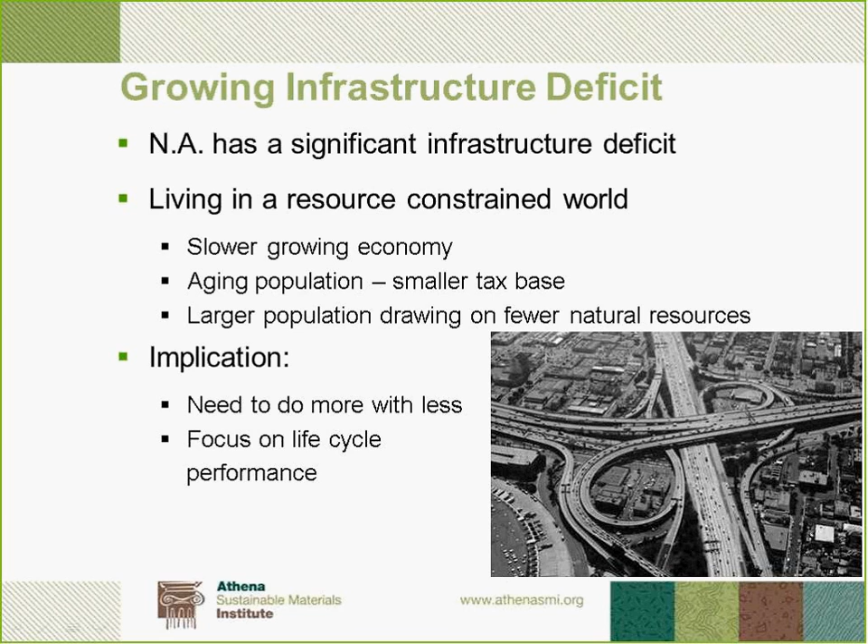It is used by various industries when they are serious about reducing environmental footprint. We can't easily reduce our footprint if we don't know what kinds of impacts we have, how big they are, and where hot spots are. Manufacturers use LCA to reduce footprints of products. Designers use LCA to reduce footprints of their products as well, which would be buildings, highways, etc. If we don't use LCA, we're just guessing what sustainable is and what it isn't.

Without LCA, we also tend to focus on a single issue or a single life phase. We may therefore be missing a major part of the equation. We may be addressing short-term improvements while incurring long-term damage. We may be fixing the wrong part of the problem. We may be shifting our environmental burdens from one phase to another. Here's a specific LCA diagram courtesy of our colleagues at MIT. The end of life cycle stage does not come into play, as we consider roadways to be permanent pieces of infrastructure that undergo maintenance and rehabilitation into the foreseeable future.

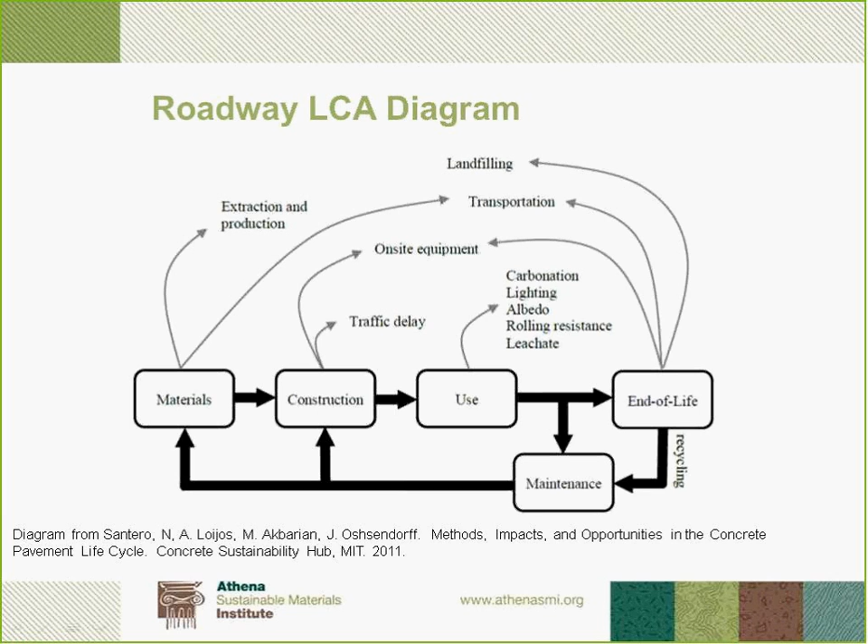The Impact Estimator for Highways was originally conceived of in 2009 and has been under development ever since. The beta version was released in spring 2011 and was funded by Environment Canada and the Cement Association of Canada, with technical highway engineering expertise from Morrison Hershfield. The commercial version was released in May 2013 and was funded by the Cement Association of Canada.

With the Impact Estimator for Highways, the tool can be used to model life cycle effects for roadway cross-sectional design, with LCA results for materials manufacturing, roadway construction, use phase, and maintenance life cycle stages. It allows custom roadway design, but also comes with a library of existing designs that can be used as a launching point for a new design, or can be duplicated and the duplicates modified.

The data of library roadway designs cannot directly be altered by the end user. Rather, users can use the database library designs as starting points, as I just mentioned, by either loading and duplicating the sample project version of the library, or creating new roadway designs and choosing a library design from the scenario drop-down list. Grant will show this later during the demonstration.

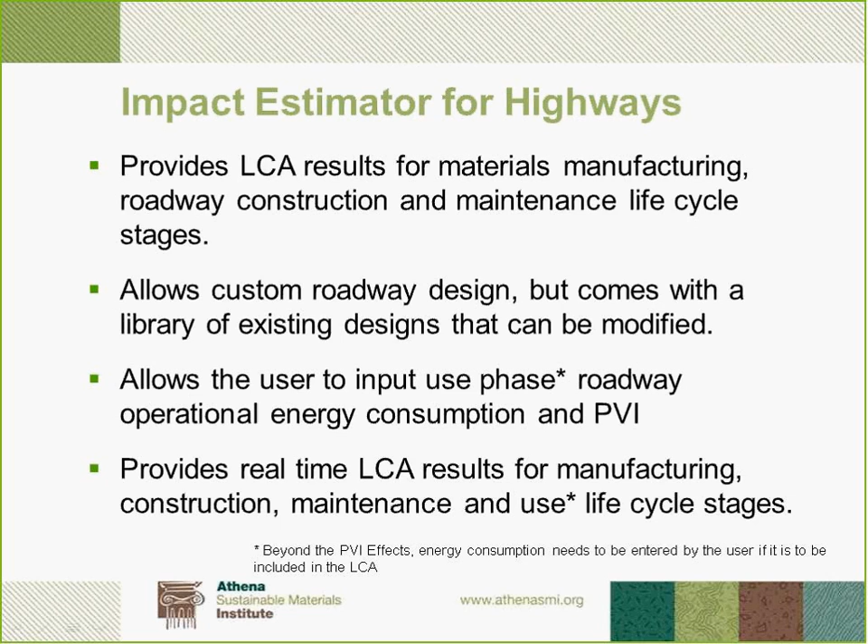It allows user input of use phase roadway operational energy consumption and pavement vehicle interaction effects, broken into two buckets: consumption due to PVI and roadway operational energy consumption. It also provides real-time LCA results for manufacturing, construction, maintenance, and use life cycle stages.

There are about 100+ roadway materials in the database, and it's growing. Of these, there are 40 component materials for which we have regionalized LCI data, and the products like asphalt or cement concretes or admixtures or a variety of custom mix designs are made up of the component materials. You create and save customized product mixes. You can make as many custom products as you want and save them in a user-defined custom product library.

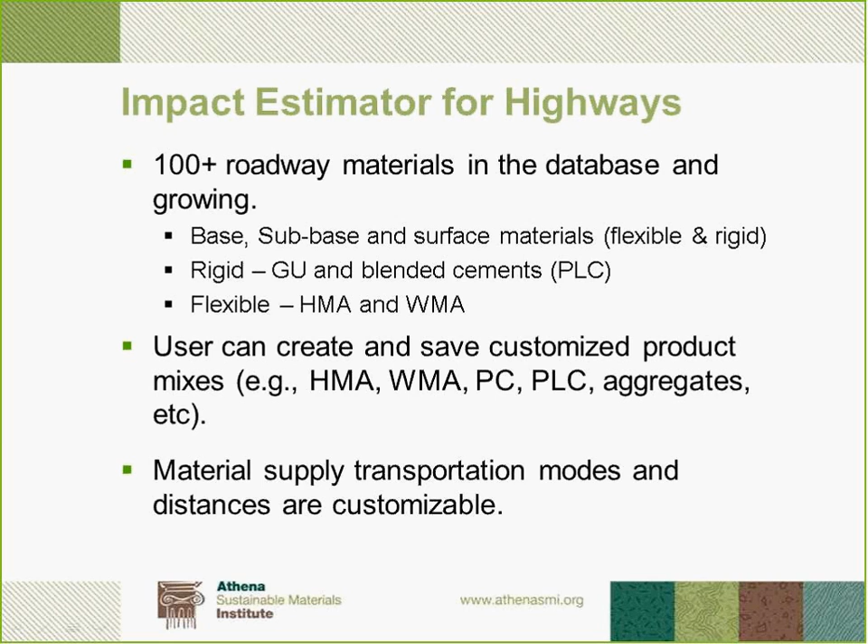Material supply, transportation modes, and distances are customizable. Material data can be regionalized to local transportation and energy grids. The large equipment database is customizable to reflect the regional and seasonal working conditions and usage rates. They do not include above or below ground material infrastructure, such as wing walls, culverts, bridges, etc., and do not account for site preparation or excavation, which we consider to be common to comparable road types and designs.

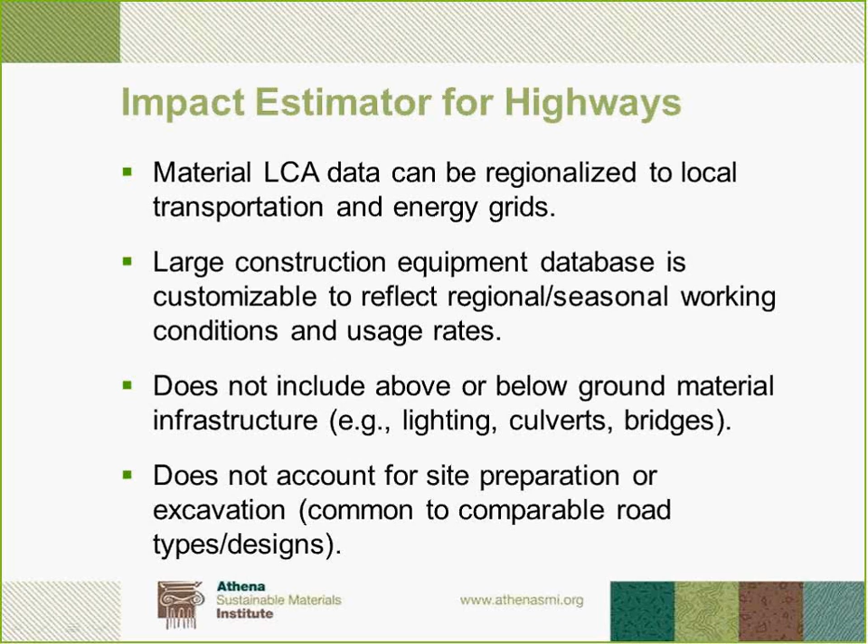Energy and transportation data are derived from proprietary Athena databases, as well as the U.S. Lifecycle Inventory database and the EcoInvent database. Material data represents national or industry averages for the extraction, processing, and manufacturing of materials and products. Regional grids and transportation distances are then applied to manufacturing process energies and material sourcing distances to arrive at regional data profiles.

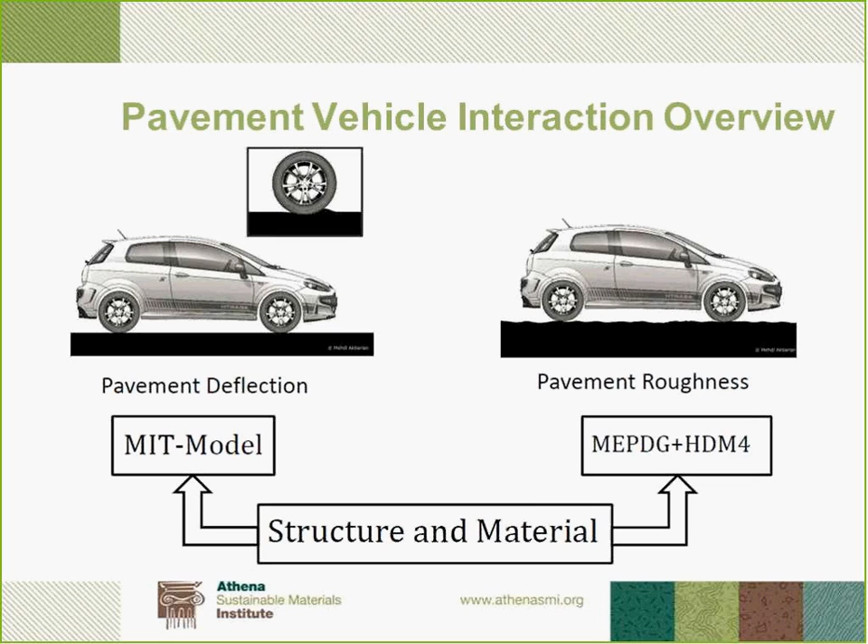You may ask yourself, what exactly is pavement vehicle interaction anyway? The PVI is based on the latest research and model from the Concrete Sustainability Hub at the Massachusetts Institute of Technology. Here is an image that helps to visualize the two components of PVI. Deflection causes the tires to constantly be rolling uphill. Roughness causes the tires to experience friction along the roadway surface. PVI is a function of roadway deflection and surface roughness, both of which depend on the makeup of the top layer of pavement on a given roadway surface.

The model demonstrates possible increase in vehicle fuel consumption and related effects associated with the pavement performance over time. It does this by contrasting the pavement's roughness and its deflection over time relative to a theoretical rigid and smooth roadway, focusing on the effect of the pavement's performance, not the life cycle vehicle effect. Fuel consumption for passenger vehicles and trucks. It models the influence of progressive increases in roughness and deflection of the roadway's top layer over time, measured between major rehabilitations, and a calculated decline in performance as increased vehicle fuel use due to the pavement characteristics.

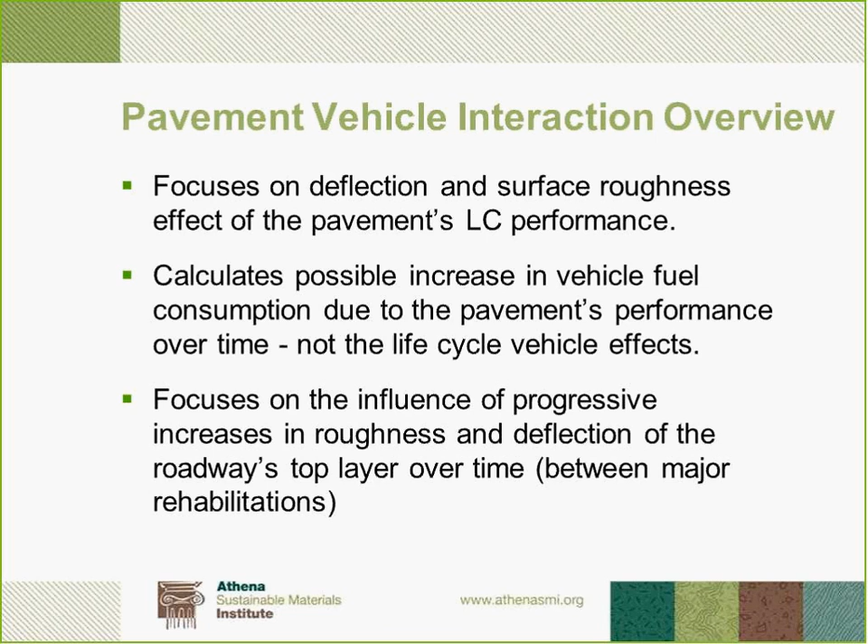The PVI inputs include the following: length, traffic speed, times or slices that represent the start and end years between major rehabilitation events, the standard International Roughness Index values for each time segment, elastic modulus, thickness and density average values for each time segment, vehicle type, annual daily traffic expected at the beginning of the project, and the projected annual growth through the end of the project lifespan.

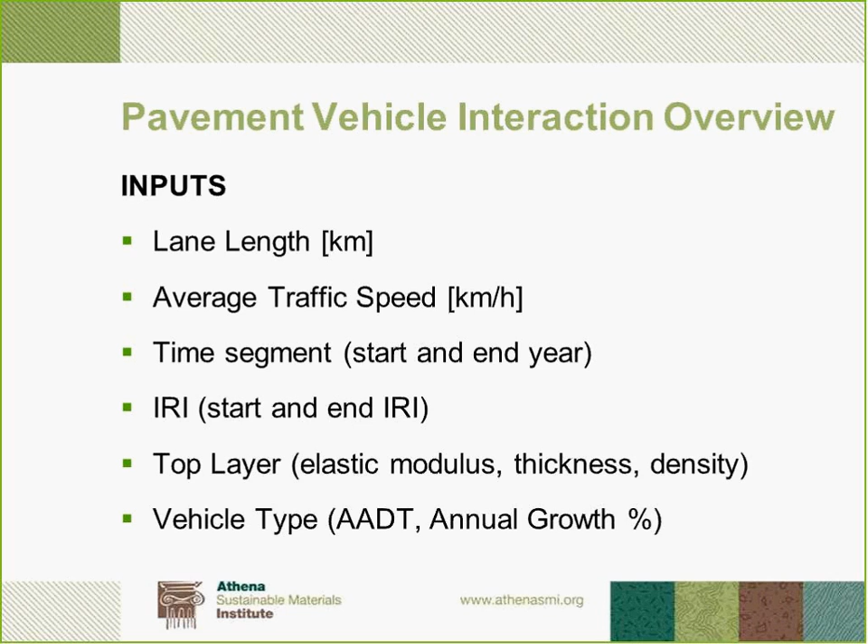Results include possible fuel consumption increase and related effects associated with the pavement performance on a per vehicle basis. Passenger vehicles and trucks, again, are based on Federal Highway Administration vehicle classes, for vehicles projected to be using the roadway during the projected lifespan; the default value for projected lifespan is 50 years. The results are dependent on average vehicle fuel consumption and physical characteristics. The lack of quality fuel consumption data by vehicle type at specific traffic speeds is an area of concern that is presently being looked into by our colleagues at MIT, a deficiency in the data upon which the model is dependent.

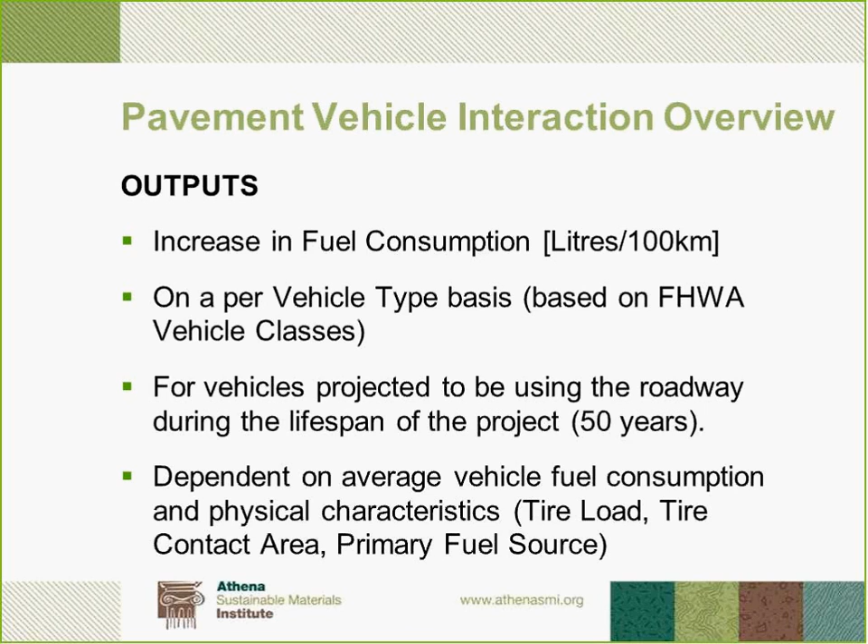PVI has been studied in a number of one-off pavement reports. To our knowledge, it has never been incorporated into a commercial software tool. Unlike life cycle inventory data for materials, plant operation, and construction, which have been studied at length and for which there is considerable literature, PVI is relatively new and represents a forecast or future state scenario. A scenario carries with it a degree of uncertainty that needs to be duly considered. Obviously, uncertainty would be best handled by using a statistical probability approach to the calculation model and the underlying data, something that this tool does not offer.

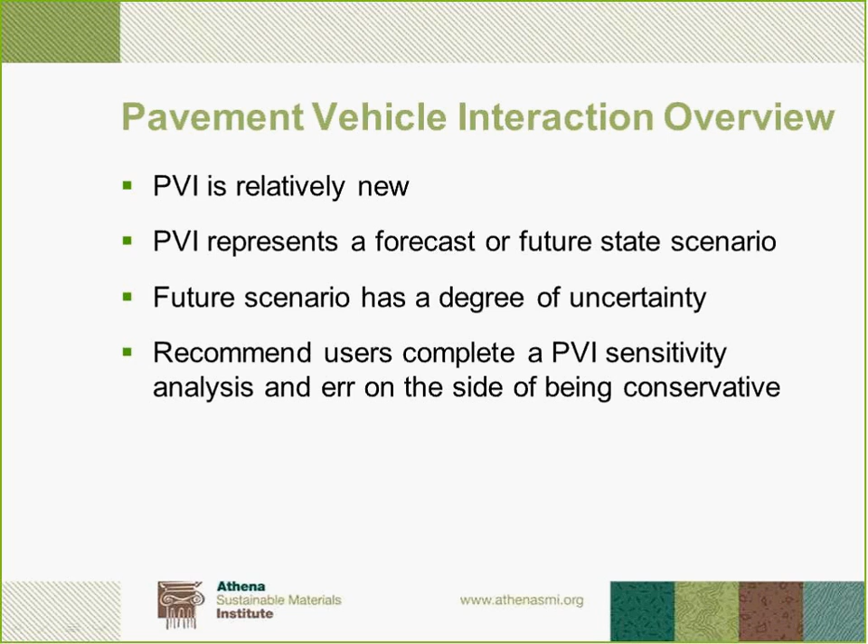Hence, we encourage those using the results from this PVI module to always acknowledge this uncertainty when discussing or presenting these results. Moreover, we recommend that when using this module, users complete a sensitivity analysis and err on the side of reporting conservative results in any public representation of these results.

Now I'll turn control over to my colleague Grant Finlayson. Right here, we're going to switch.

There, one can see the Impact Estimator for Highways open. That's what's showing on another computer, so I think we'll go ahead. This is what the program looks like when you open it up. It's blank at the moment. I have 2 projects already preloaded in here, but when you do open it up, these wouldn't be loaded here.

These are 2 of the pre-installed, not all, but sample projects that are available in the tool at the moment. There are 4 of them, all modeled based on an Applied Research Associates report on Ontario municipal roadways. And it's sort of self-described in the title here. Here we have Ontario Municipal Major Arterial, PCC or HMA road, with a 10,000 traffic number and a subgrade modulus of 50 MPa. And so that's sort of the height.

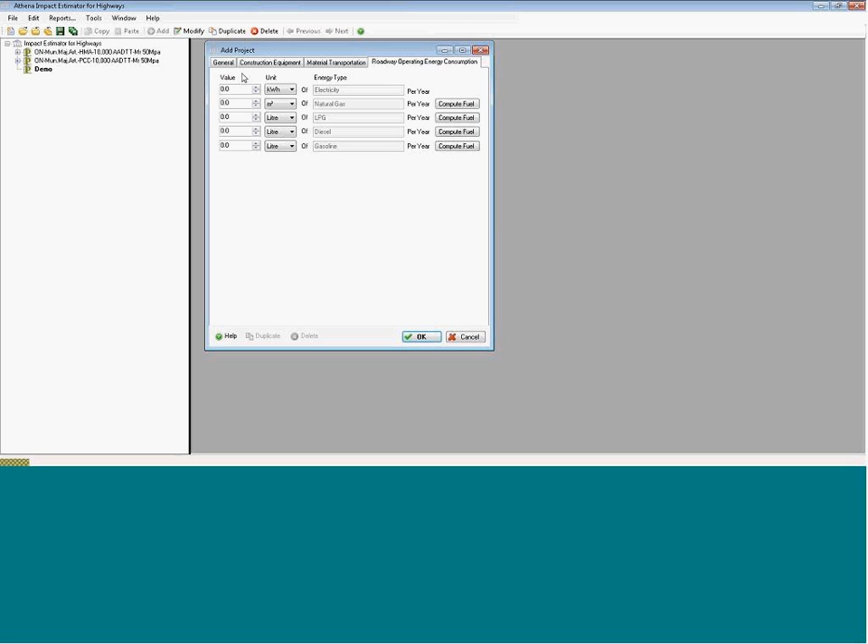I have here a roadway operating energy consumption, where you can input any number of values for these fuels if you want. For instance, if you wanted to put in the lighting for the road on an annual basis, you put in X number of kilowatt hours of electricity to the road, and burning or using these fuels will be calculated and incorporated into the results. I'll probably go back to construction and material transportation a little bit and maybe just show a couple of the details.

For now, we've created a project, we've chosen a location, and you see here I've got a new project added in my project list up here. The next thing to do is to create a roadway. So I just right click down here, and a little box pops up, and you see down here we have add roadways. So we're going to add a roadway, click on that. A box will pop up.

So this is our design box. We can give it a name. We can call it whatever we want. I'm going to make this, let's say, an HMA demo. We have scenarios here. You can create your own scenarios and save them, but we also have preloaded ones. And these ones that are preloaded are available as full sample projects. You can choose one of these from this list here if you want to quickly start a project and then modify it. But I'm going to start from scratch here.

And then we have to fill out a bunch of these boxes. So we have initial cost. Let's say a million dollars. I'm going to do a 1 kilometer lane length. Make it 2 wide. I'm going to say there's 1 pavement lift, and I'm going to say there's 1 granular layer here. For simplicity with this example. You can have pretty much any you want in any number of lifts and granular layers.

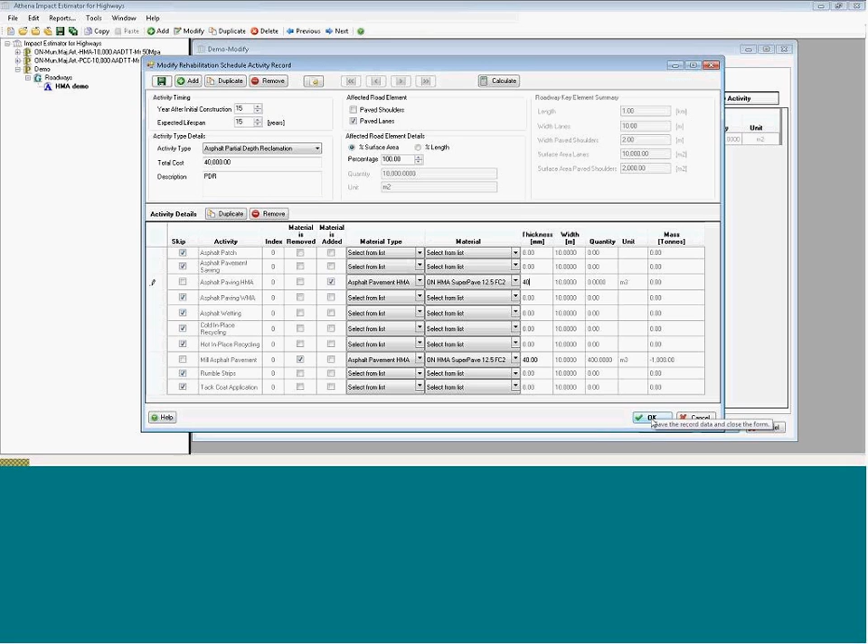First rehab step, if I click OK here, it adds here in the table. If we need to edit it, we can go over to the left-hand side, and that pops up the box there. That's how we do the step. And then if you give a road 50 years, there's a whole bunch of rehab steps, and I'm going to show you the complete files in a minute.

But once you finish your rehab schedule, next go to your PVI schedule. And this is the MIT study or model that we've incorporated into here. It requires some information from you. This no PVI effects, I'm going to unclick that because that was the error message I got before. It was telling me that I had not completed this section. If you don't want to complete that section, you can click that button and leave it on, but we're going to do it here. So we go to the PVI section.

PVI needs to be input for every major rehab or when you change the surface of the road. So we just put in a mill and repave rehab step at 15 years. So I'm going to say for the first 15 years, HMA asphalt, which let's say has a top elastic modulus of 10 GPa. Thickness was, I put 150 as the top thickness, but that's probably an unrealistic number. Let's say it was 40 as a top layer, and we removed the 40 and replaced the 40.

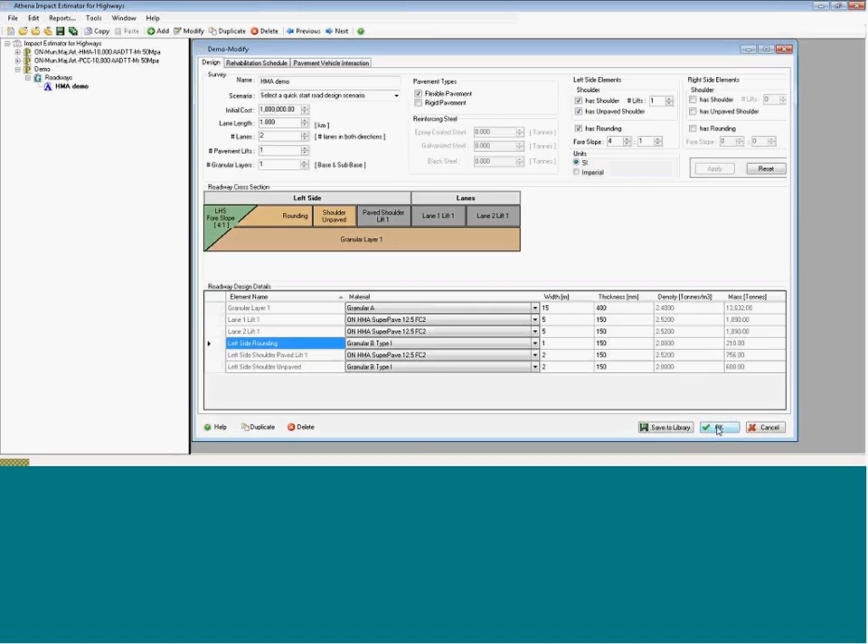And like I say, every major rehab is going to have to have a row up here for changing IRI scenarios. So we've completed our PVI, we've completed our rehab, let's say, and we've completed our design. And I click OK. And so we have our road design, and basically we're ready to look at some results. I'm going to click Save on here for that now.

And then for this demonstration, I'm going to go up here to one of the included sample files, which is Ontario Major Arterial Road, HMA with 10,000 daily truck traffic and a subgrade modulus of 50 MPa. I'm going to click Roadway. This roadway design did not have any shoulders or roundings on it. So you see here, we just have a simple 4 lanes with 2 lifts and 2 granular layers.

And all these things are populated. The whole width is a 16-meter road. We've got 2 outside lanes at 4.25 and 2 inside lanes at 3.75. We've got 2 granular layers at 500 and 150 millimeters thick, and we've got 2 lifts of pavement at 140 and 40 millimeters thick. So it's the same thing as I just showed you.

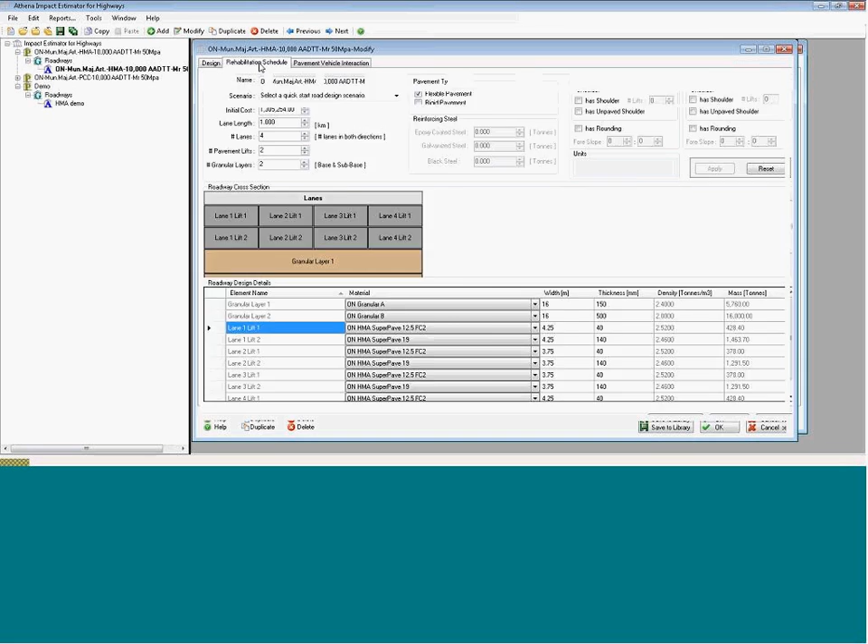I go here to rehab schedule, and there's a rehab schedule according to that report that we talked about. So at year 8, we've got spot repairs and route and seal. At year 13, spot repairs and route and seal. At year 18, we have a full depth repair with a 50 millimeter mill and surfacing. At year 23, route and seal and spot repairs, route and seal at 28 years, mill at 32 years with resurface, a route and seal at 37, etc. And that's sort of the complete rehab for this road.

And we've got vehicle interaction here, and PVI section here, and between each of those mill and repairs and resurfaces at 18 years, at 32 years, at 45 years, we have the change in IRI. So we're starting at 1 and ending up at 3. And we have the truck traffic down there. And that's basically what a complete road life is going to look like in a rehab schedule.

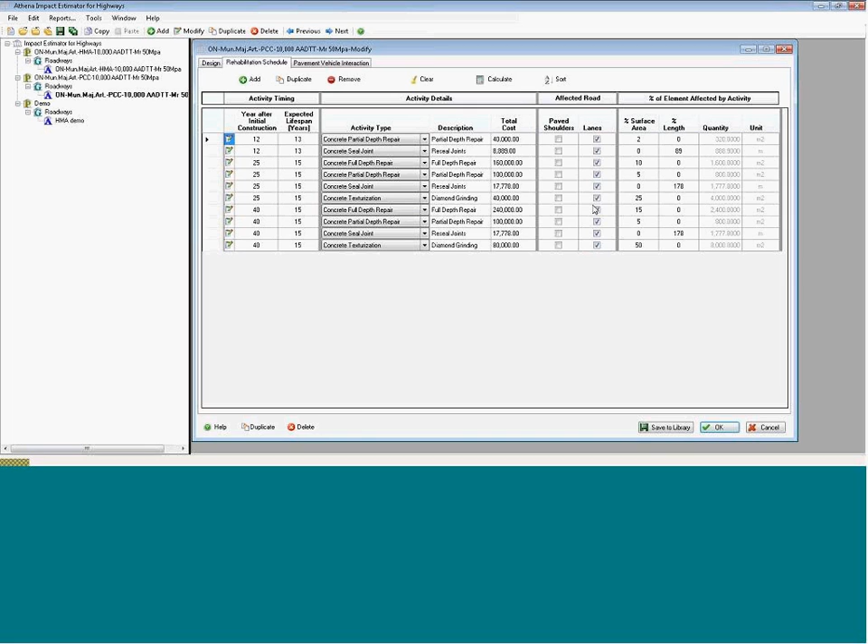And the IRI gets switched at every resurfacing. So for instance, at 25 and 40 we're not doing resurfacing. What we're doing here is grinding and texturization, and it's taking off 5 millimeters each time you do that. We started off with a 200 millimeter layer. Second phase we had a 195 millimeter top layer, and then the third phase a 190 millimeter top layer. We have 2 road designs of the same functional road. It's a 4-lane, 1 kilometer road, and we'll look at some results.

So I'm going to go up here to the top bar and click the reports box, and this is what shows up. Choose your project at the top here. So let's go to the HMA again, and the thing we look at is the bill of materials. So with the rehab steps and all the design questions, it comes up saying this is how much of all these materials we're using over that roadway life cycle. Our tack coats, granular A, granular B, different Superpaves and asphalt sealants.

If we look at the PCC bill of materials, similar thing: granular, our concrete, our reinforcing steel, and our crack sealant.

Then what are our life cycle effects? That's what we call summary measures in here. So I'm clicking summary measures and table here and click show reports. It's a little bit small, but we're going to leave it here.

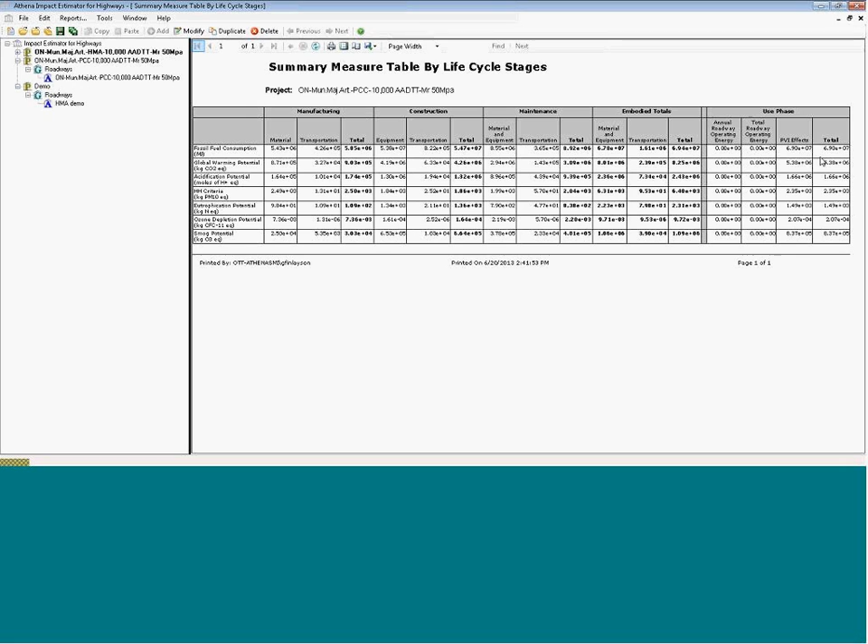And then with PVI effects here, and then the total is our totals here plus our use totals here, and that gives us a total column. I'll just go on a bigger space here just to show it here.

They're all divided by different life cycle stages, so you can choose whatever results you're looking for. If you're only looking for the initial construction, you're looking at manufacturing and construction phases. You'd only be interested in these totals here, and that's why the results are separated in the phases, in case you use something other than just the totals. The other way to look at some results.

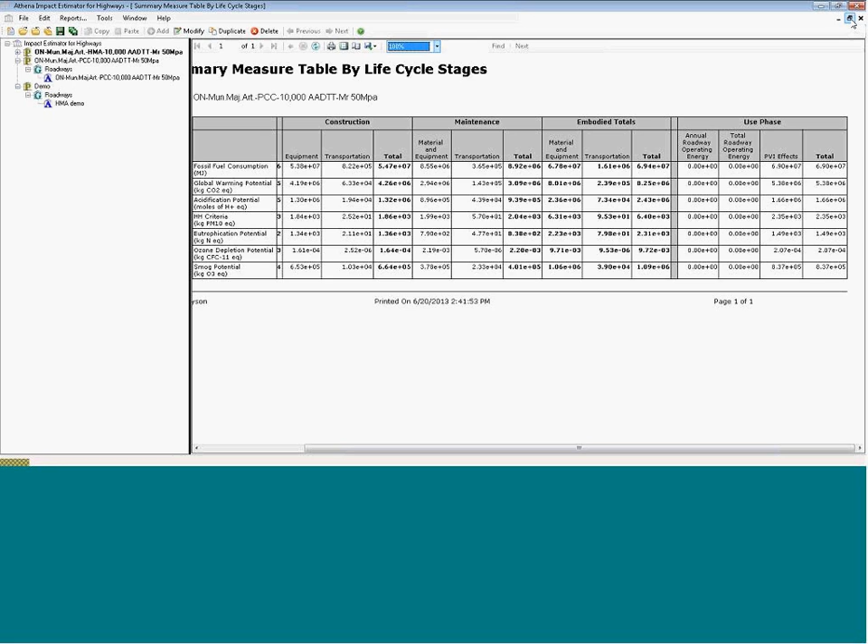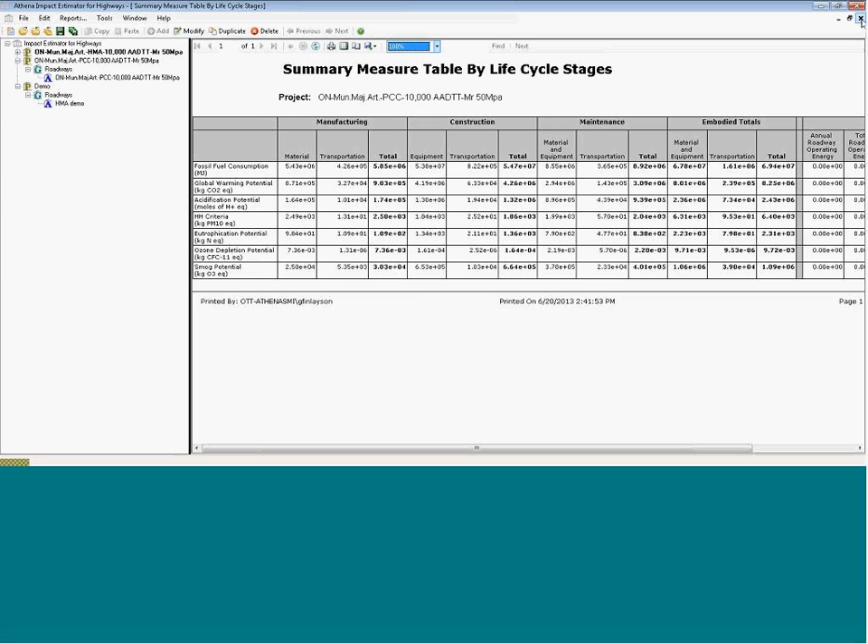Now, for any serious analysis of these roads, I would suggest you go up here, you export the table to Excel, and do your comparisons there. But we do produce some graphs of these results. We can compare two projects.

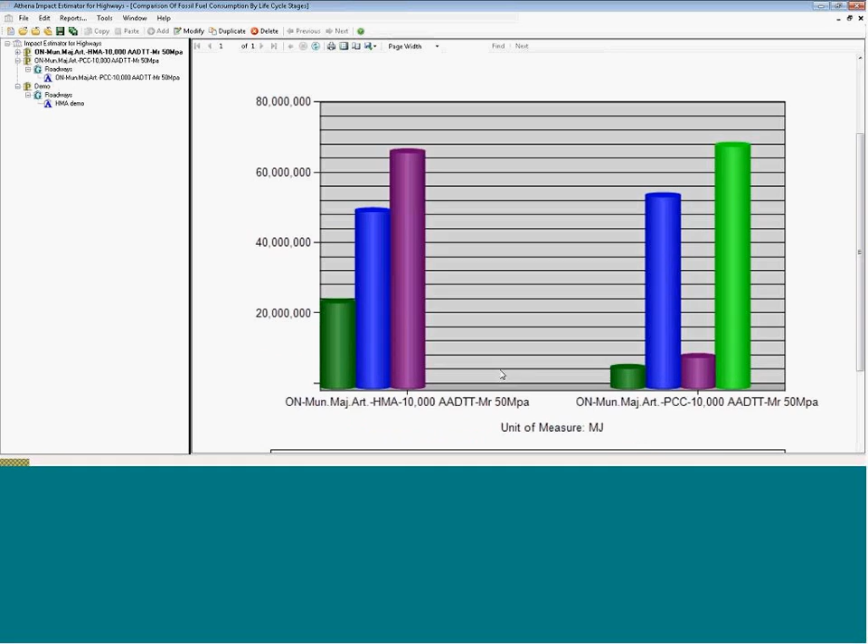So up here under comparison graphs in the reports box, I choose my HMA and my PCC roads here, and I can choose all of these. I'm just going to choose a couple now, fossil fuel and global warming potential, and I'm going to show these graphs. And here we have a fuel graph, and those are results divided by different life cycle stages. This is the HMA road, and this is the PCC road.

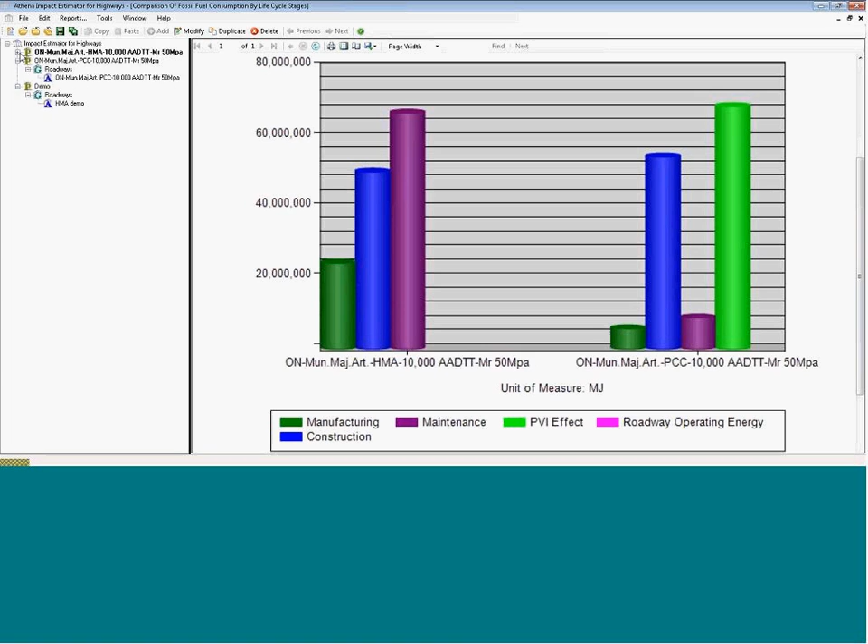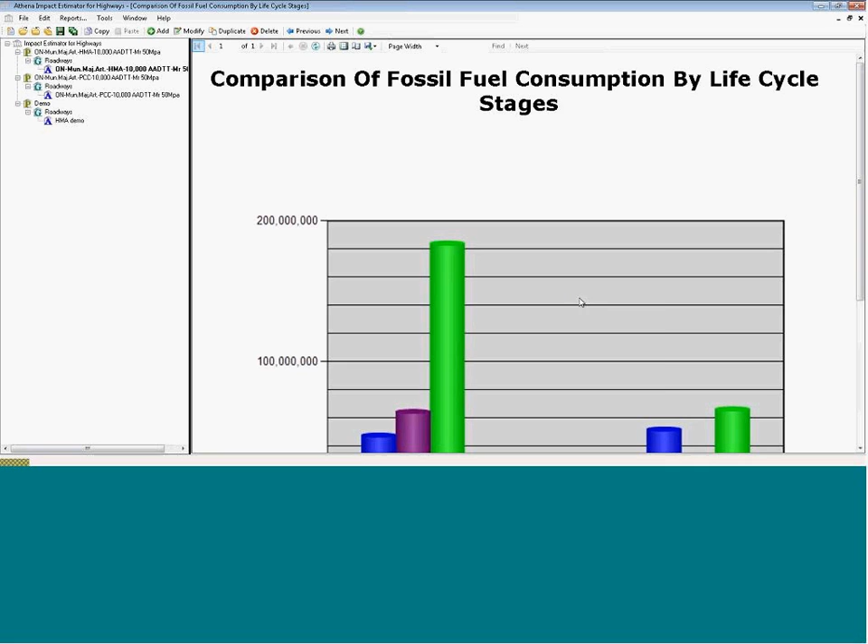It looks like here, I think I ignored the PVI effects. Go back and unclick ignore PVI effects. There we go. So now we have PVI effect from the HMA road, we have PVI effect from concrete, and the same for all the others: manufacturing versus manufacturing, maintenance versus maintenance, construction phase versus the construction phase in blue.

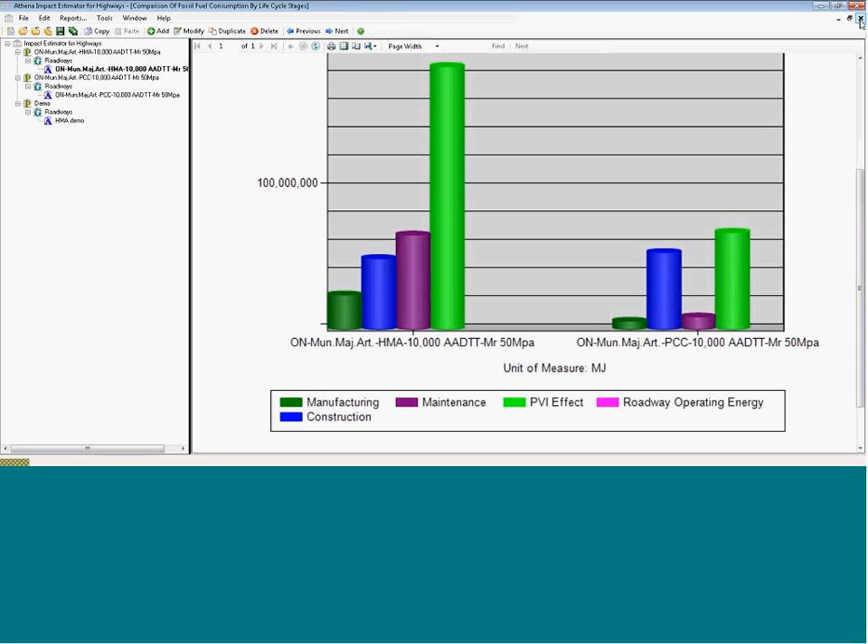We'd do the same thing for global warming. And there, it's the same idea. We have a side-by-side comparison of these two projects. Now, if you want the numbers for these, it's not very accurate, but it gives the visual idea of the relative effects of two different roads. Sorry, let's get rid of that little box there.

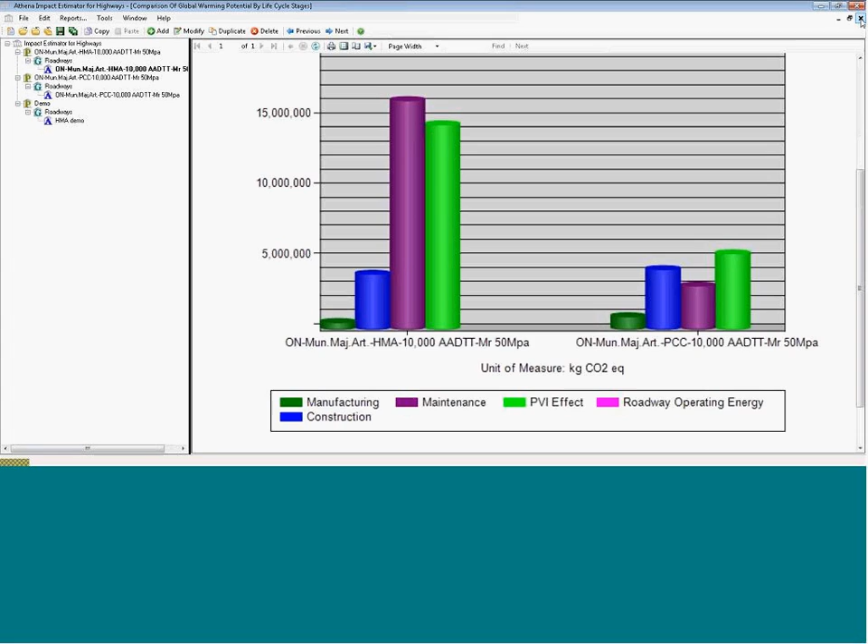And that's the visuals of it all. Those are the results you're looking for. You're going to be exporting it to Excel, and comparing numbers probably in Excel if you're writing a report or something like that.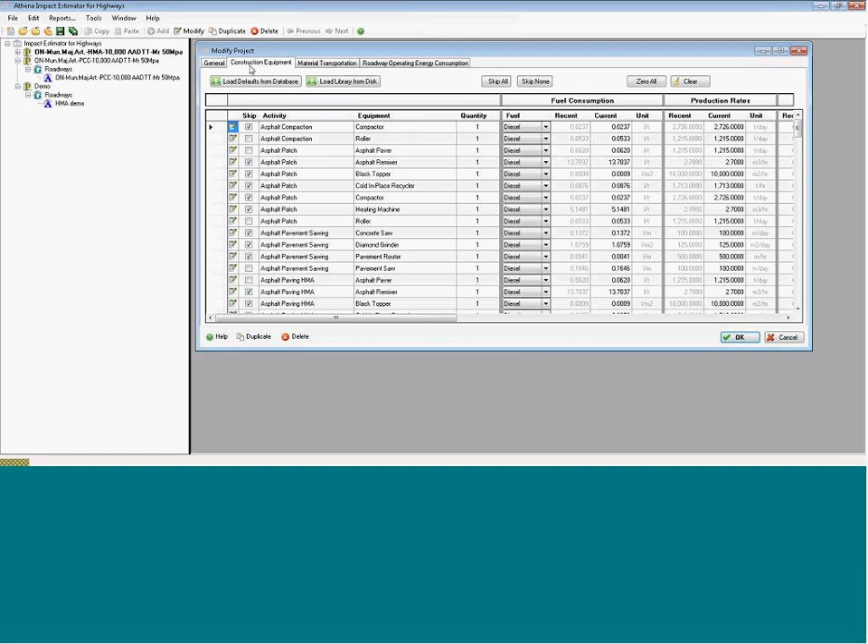And we have all sorts of different pieces of equipment here on the left, different equipment for different activities. What we're trying to figure out is on-site construction energy use, which means fuel consumption, basically. Almost all the time we're talking about fuel use and equipment. For instance, we've got here an asphalt compactor at the top, and in the base we have a usage of 0.0237 liters per ton of asphalt.

Now, there's a great variety of weather conditions and soil conditions and usage factors for these numbers, so we've chosen sort of a net number, but if your situation is different and you want to dig down into this, you can go change these things. And the easiest way is if you know what your fuel consumption is, you can just change the number here.

So I can change that number to 0.05 if I want to. And there it is. Now we'll start using 0.05 for that piece of equipment. The other way to choose it is the number of columns to the right here: production load factor, hours per day, minutes per hour, secondary fuel consumption. You can put numbers in there, so we'll change the calculation here.

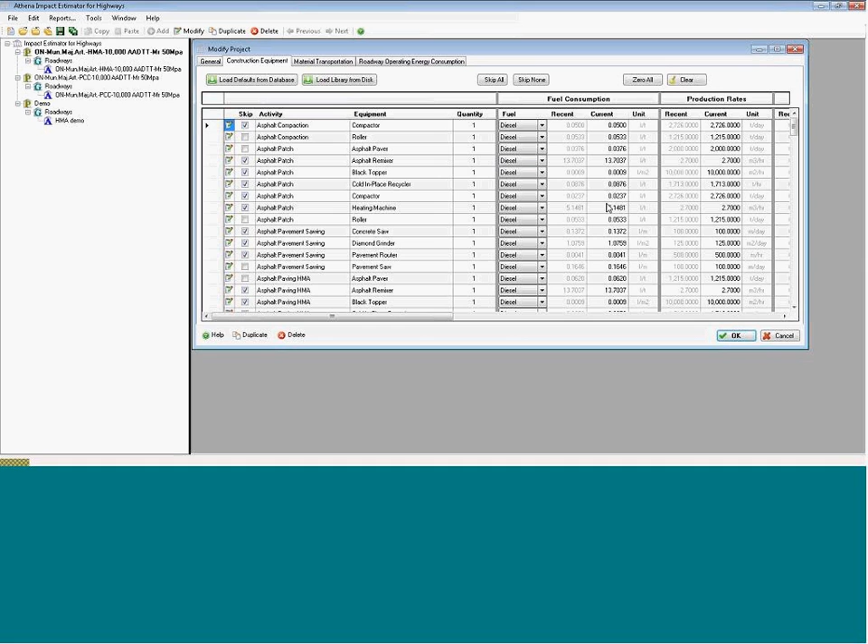So for instance, for asphalt paver, if it's doing 1,215 tons a day, if we change that to 2,000 tons per day, you'll see here it starts off with a 0.0620. If I click 0 there and clicked OK, I should have just carriage returned. I changed to 2,000 and changed from 0.6 or whatever the number was. I can't remember that number now. Anyways, that number changed. That's the idea. You can customize this equip table.